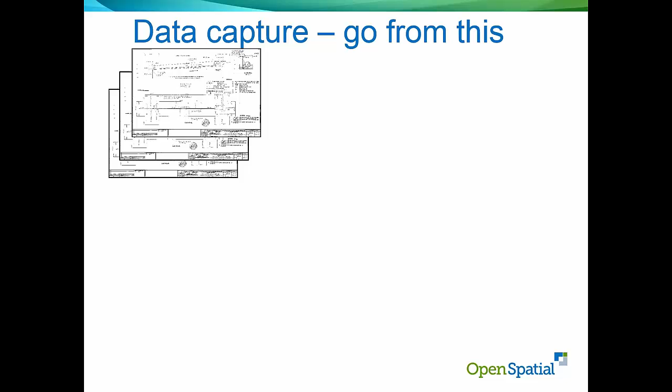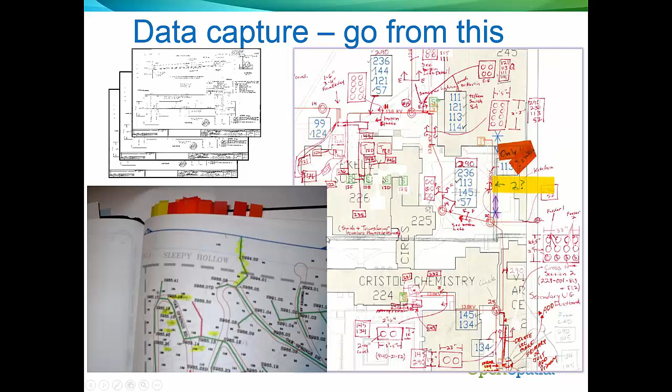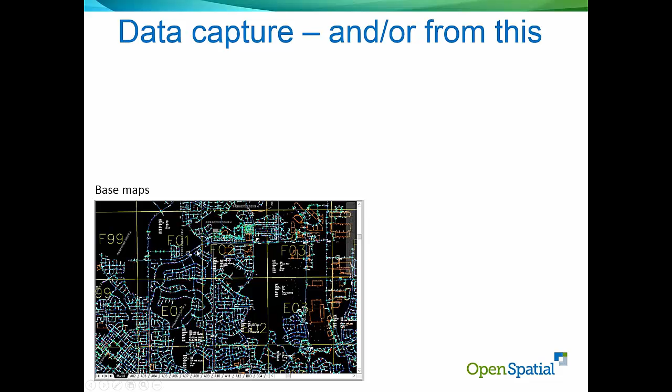But let's take a look at this data conundrum. Data capture can really go from scanned record plans, red lines, or map books - on the paper side, this is kind of where you'd come from. Or you could have CAD drawings, base maps, map sheets, and various kinds of base maps.

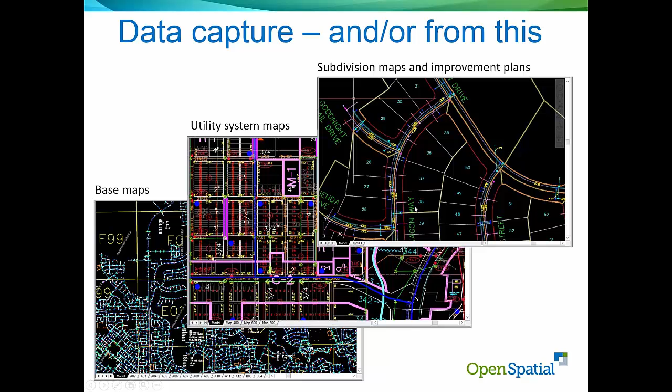Or you could have specific utility system maps or purpose-built maps. Or you could be at the stage where now you have subdivisions and improvement plans coming in, and you have a GIS and you're trying to bridge that gap between the CAD stuff and getting it into your GIS. So data can come from virtually anywhere, and I'm going to touch on those sources and show how you can build that out.

Let's start with this CAD piece. I'll go back to the paper, but just CAD in and of itself - CAD data is interesting, it's just not designed for GIS. It's designed to view and to communicate information. And so when people draw things, they don't always snap stuff.

They may even break lines so they can put text there so it's readable. Of course, that really makes a problem if you're trying to get a line into your system that's an actual pipe going from one point to another with a length calculated. Or if you're doing a modeling network and you have pipes with no node or junction on the end, and they're just incomplete - so you don't know whether that connects or doesn't connect, or whether it's just bad data.

Or even putting symbols where you break the line work to leave space for where the symbol is and you snap to the edge of it. Now, CAD is a great tool, but you can draw anything you like in any which way you like.

The amount of level of structure is one thing, and the other part is the attributes. It's really fairly difficult to get attributes. You can go into blocks, and this may be text, or it could also be an attribute within that block. But even if it's an attribute in the block, that still doesn't solve the conceptual problem of northeast, south, and southwest, where you kind of have to go do angle calculations and assume the map is true north. But just reading things like 24-inch chilled water return versus supply, or invert elevations and rim elevations, and getting all of that loaded, or ID numbers for various valves and appurtenances.

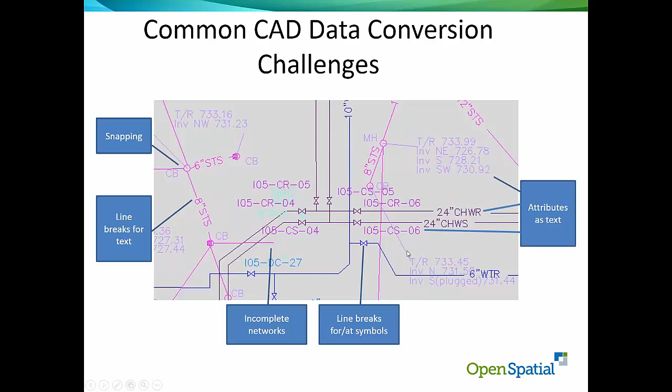The other thing you may have is this: a whole set of folders, and in the folders you have scans of the actual signed plan. So this is the legal data of record. So going from paper to CAD, how do we get that into GIS?

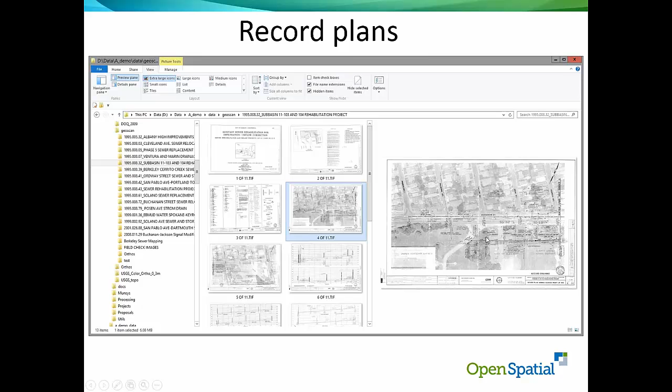One of the things we do is we have this product called Munsys, and in there one of the functions, it's a set of menus - I'm not really trying to focus on the product too much, except to show you that it really helps a lot with this. But you can take an image and what we call geo-reference it.

One, it's very useful because now you can do heads-up digitizing, and you can go edit and update or create new data. If you're doing that in Munsys, you'd do it right off the menus, so that would be very quick and powerful.

The other thing is there's a lot of information on this plan that you might want to use later on for other things, like where was the electric line that came through that they did this, when they surveyed this they went and found it, or the storm drain, or anything that goes on with this.

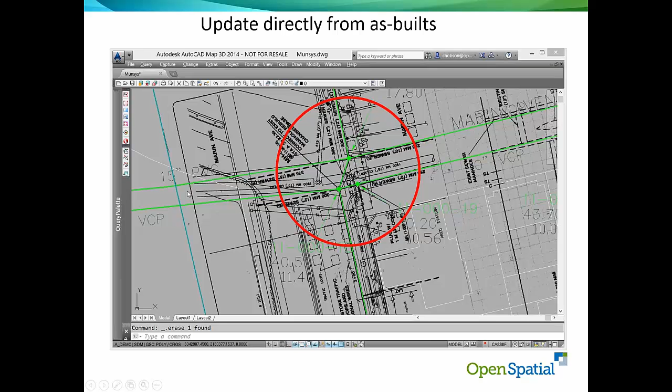The other thing is the plan itself. What you really want to be able to do is come back later and say, what plans do we have at this street intersection? And so when we capture this, we actually capture metadata with this plan itself.

So this little box - we actually put on that what the file name is, where the folder is. You can enter attributes of what the project name was, what the year was, and everything. And then you can go anywhere on this map and draw your little box and query everything into that particular box.

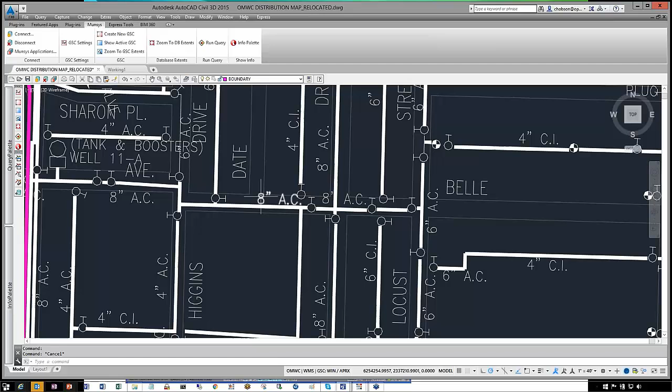Let's go look at this data set quickly. Here's some CAD data. This particular one has already been relocated, as you'll see in the title. If you look at the CAD data, it has exactly those sorts of problems. This one's pretty schematic, so you'll see it's just a line, not broken where something tees off it. The attributes of the line, I can see it's in the layer, but that's about it. The scale, things are large, exaggerated. The text, the pipe material, is not on any of these pipes, and it's very rough.

If we locate this against the actual parcel map, you'll see that they're pretty far off in this area.

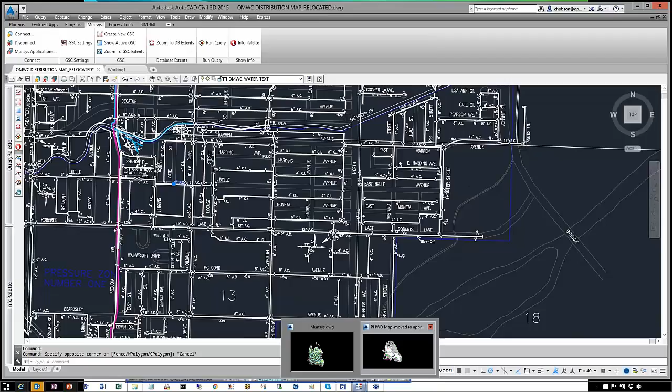If I go to another data set, here's a system-wide CAD drawing. If you zoom right in, you'll see that it's got all of the stuff in there. This red pipe here is a water main zone 2. I can see that in the layer. Wherever you have a hydrant, it's not broken, the line just keeps going straight.

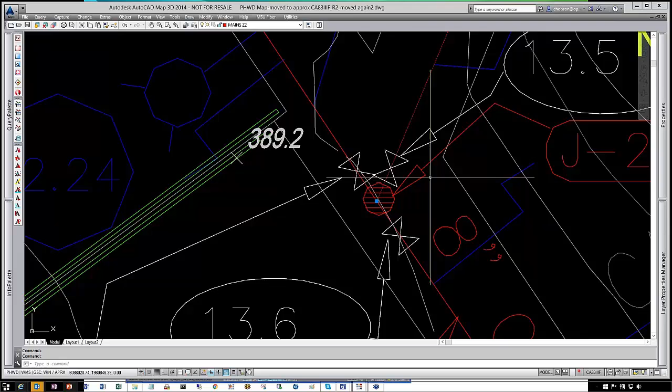So common problems you see there: how do you actually get that to go straight through the valve? How do you get things like the valve number here? This thing is actually four separate lines, so obviously someone exploded it, so it looks like a picture, but it's actually on the line there. And its number, this would be the valve number right there, is a piece of text, and it has some line work that goes with it, and a dimension arrow.

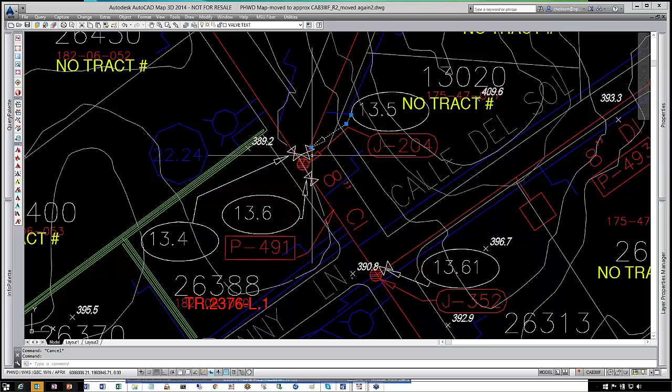So getting that into your GIS is the challenge, one of the challenges. In this organization, you can just see that they would not be able to give you length of lines by diameter or material. They would not be able to say, okay, show me the nearest hydrant to this position along the pipe. You wouldn't be able to relate pressure on something, calculating through a network or anything like that. So it's a big challenge, even their numbers, so that would be a customer number, and getting that to relate back to which pipes service what customers, or if the pipe breaks here, who's impacted, kind of difficult.

And that's not because CAD is bad, it just wasn't built out. This drawing was drawn years and years ago, and some of these are directly off paper.

So let's go in and just open another one here, and I'll show you that geoscan quickly. All right, we'll go up a little. Yeah, let's open this drawing. So I'm opening this drawing. As I said, what Munsys does is connect you to a single central database, and so you need to log in. I'm just logging in on a demo data set.

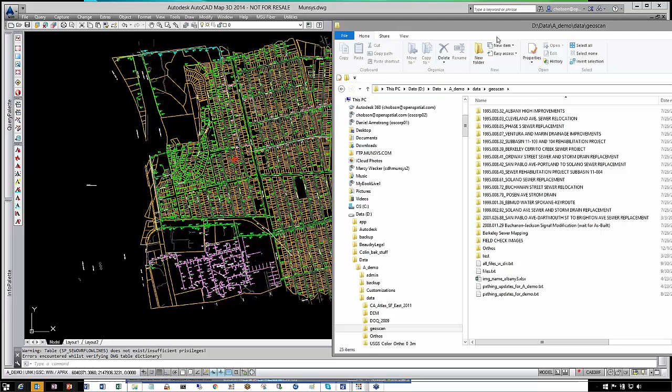So if you go here and you want to geolocate a plan, for example, what you can do is this sort of thing. I'll bring over my Explorer here so you can see what I'm doing. If you have some data, for example these folders, just pull it so you can see it nicely. But choose one of these, say you had a plan, one of these TIFF files that was a plan view. So this would be a project, and you'd have whatever you've got here.

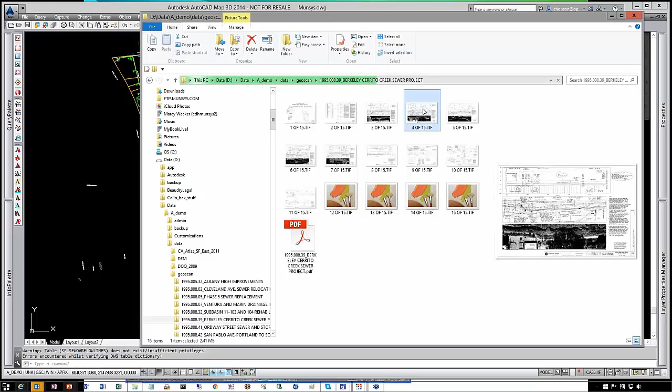Let's take a single page here, look at maybe page 4. When you use this plan piece in the middle here, it has actual locations and everything on it. So typically you just take that and put it, insert it somewhere close to where you want to put it, just to get it somewhere on the picture. Don't even worry about the rotation. So there we have a plan, and you can see there's a bunch of information in here, and it runs, there's the section and plan.

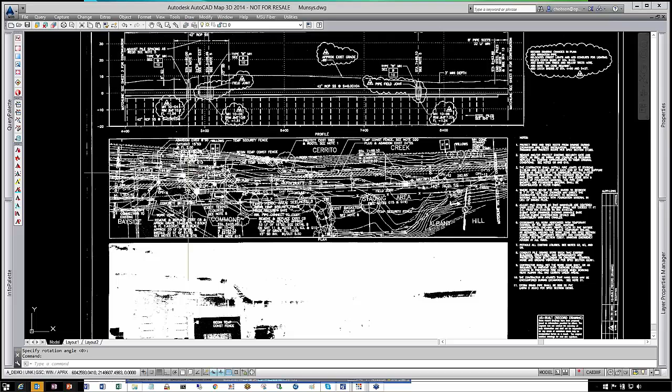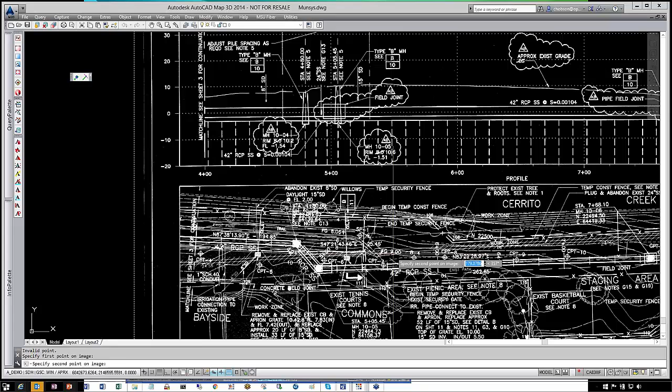So using the geoscan tools, you just go to that menu and literally say, let's say this piece here actually goes along this piece of the street. So what I would do is insert the image I did, let's go in and actually georeference this, and we choose that image, and you'll notice I just get prompted, show 2 points, and I'm going to save time by just showing very quickly. Then pretty much just go in and snap, use all your CAD snaps to 2 points on the map. Let's say that one, and I suppose I said I'd use snaps, so let me turn those on.

There we go. And so now it's scaled and referenced this thing. So that just makes that easy. The real value is the next part where we create a boundary automatically and read the data from the image. So I can say, show me this image.

And now it's created this green box, which it's automatically pulled out of that plan, what the file name is, the path, when it was scanned, and you can now come in and add additional information like the project number, project name, typically the date, anything like that. So this is just editing tools provided in the Munsys product. So you can go in and change edit attributes.

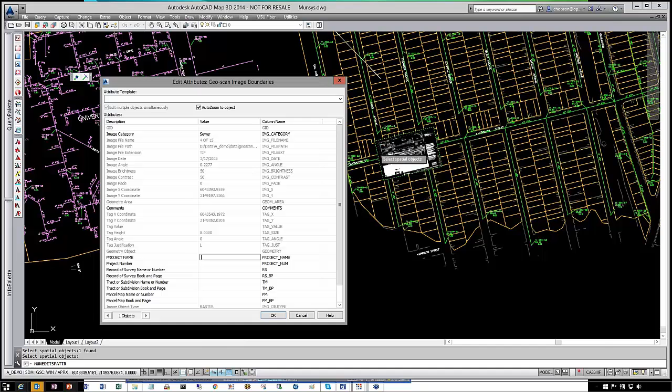And let's go to this particular plan. And let's say typically we put a category. Like this, I think, was a sewer plan. And you can go in and put in whatever the project name is, and post that to the database. Once you posted it to the database, and I won't actually do that now, I'm going to just get rid of it because I just didn't put it in the right place, so we'll move it out of there.

Once you've posted it to the database, the next time you want to retrieve anything, you can say, go to an area of the city. Like take here, for example, they were doing ADA ramps here. You can go in and set your area of interest right here for these street corners. And at this point, run a query to say, give me all plans I have that intersect with that. So you're starting to do some GIS stuff.

And let's go and say, run this one. And what it's done now, if you look down the bottom, I think I'm going to undo that. I think I had a setting that did not use my little boundary, so let's just show that boundary. Yep, we need to use our area of interest, so we'll run that query again. So you can see the 137 that were loaded. Now that looks a little better. You can see down the bottom I have 8 boundaries loaded.

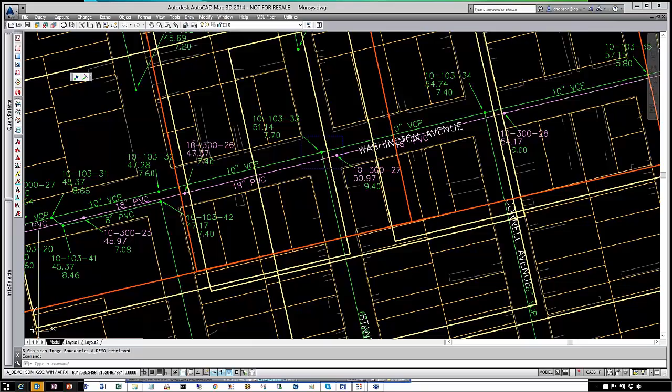And if I zoom out a little, you can see the squares are colored either yellow or orange. And each one of those is a different kind of plan. The orange ones are sewer plans, the yellow ones are field checks. So at any time I can come in later on now and get a punch list of plans that intersect that area. And then I can come in, of course, on the screen and load those.

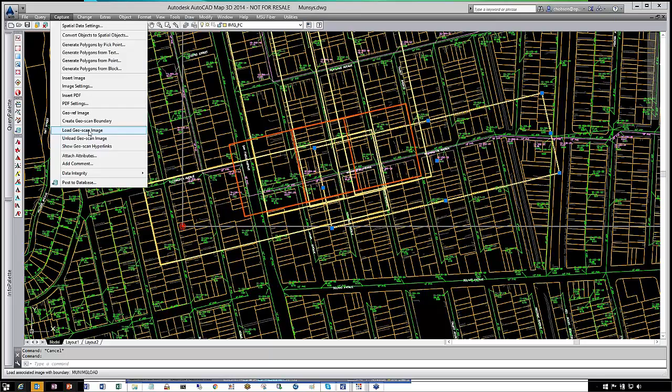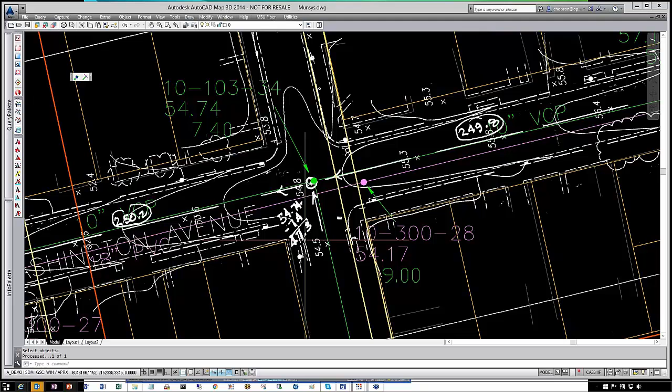So I just go in and load the image. It says which one. Let's say this one here. And hit enter, and it'll go. It knows the path. It can load it, and now we can restore it as backdrop again. And so you'll see these values here were actually loaded, they're by the depths, and we've got 7.4, 54.74, and there's all calculated field check. So this was a project to load this. So that's paper.

You can draw straight off the menu. And if you do that, you're essentially recreating CAD data, and you could be doing that just in your GIS product as well. Except CAD really does offer a very rich drawing experience and very efficient. But if the plans came in as CAD data, the thing you could do in Munsys here is you can literally just go in and convert a whole bunch of line work or blocks to any kind of object, and this is in the water application, and we have specific industry-specific applications for the various utilities.

So if I was taking this set of lines and I said, okay, I'm going to use the actual CAD geometry for these lines, I could go in and do a quick select and select them all by layer or whatever, but for now, I'll just pick a few. And I could go in and convert that. So I've taken that as CAD now and turned it into a database object. All that we've done is taken the default.

So at that point, you could also go in and edit attributes. So we take this CAD data here that we just put in, and we can say, okay, let's edit the attributes on that. And let's say that actually was a 6-inch PVC pipe.

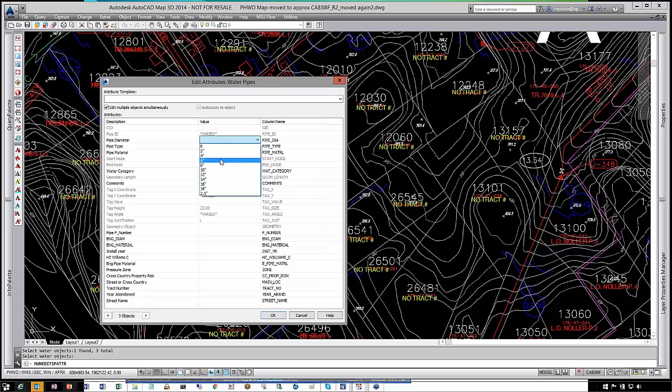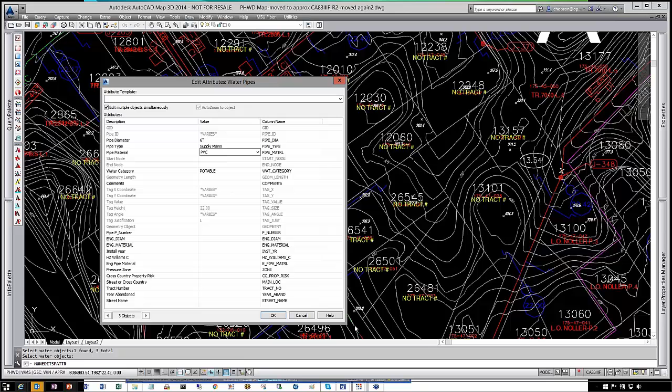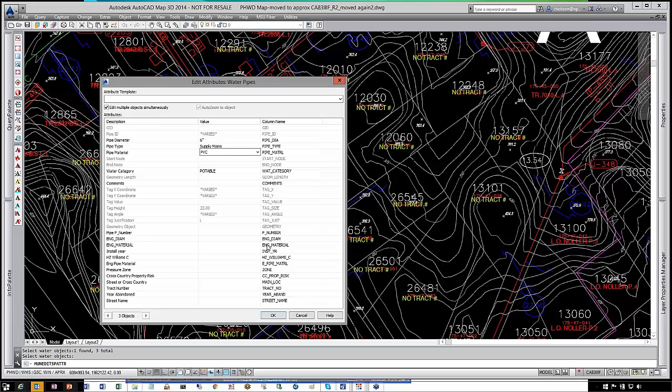Okay, it's a supply mains, and so we start adding. You could be doing this in your GIS, except that I've now converted that directly from CAD into here. Munsys deals with arcs, it deals with attributes and blocks, so that you can build these out, and then it also allows you to build structured networks. So very, very powerful set of tools, and really speeds up the ability to do that.

Now there's a couple of things you have to bear in mind. One of the reasons this is very powerful is you want to keep data in the control of the people who use the data. So for engineers, you want to keep them using CAD. And so Munsys allows them to edit their own data. Every bit of data that I convert here into the database can be viewed and connected to through ESRI, for example.

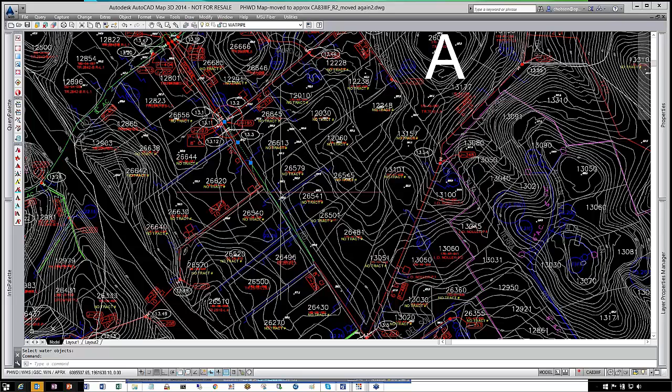So what we're doing is you're changing who's responsible for editing the data, and that's really probably the biggest impact, because you don't then have to go to an engineer and say, oh, by the way, you're going to use CAD and GIS, and you're kind of going to work between the two of them. Mostly, if you're using the Munsys product, you can continue to use CAD and build out your data, but in the meantime, you really are building GIS data with structured, connected networks that are traceable, drainable, all of that, and I'll show you that just in a minute.

So inside of Munsys, there also is the MunConvert, because part of the problem is that a lot of the objects have more data, like in a block or something. So line work, you kind of pick out layers or whatever. But let's say I wanted to go and do water nodes. We could come in and look at the drawing. And so this is a tool for pulling in, if I go to assign, if there was object data, you could see these are all of the object data tables in this drawing.

I could pick up for this particular node type feature category, and I could put that into that column in the database. I could also go in and look at if there was elevation, I could pick that up off of the object property. You see this is exposing all of the details within the CAD drawing. Okay, so if I looked at object dot, let's see, we got a block position Z, so that would probably be for the nodes. We would put that in as the elevation. So as I go in here, I can put things in.

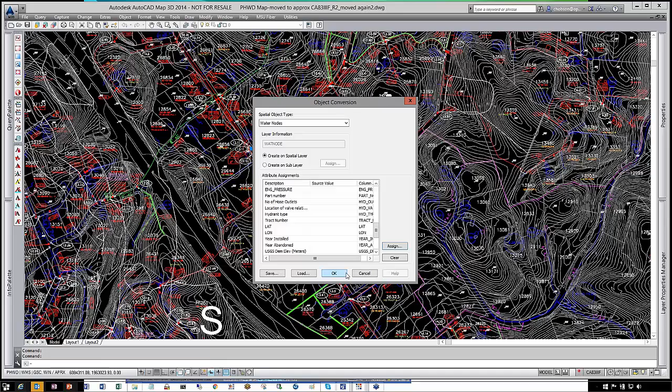You can assign IDs. So if you don't have an actual number, you could assign that from a database sequence. So we come in here, we put it in off of, say, we're doing water nodes, so that would get the next available number. Any number of those things. So you can put in, and this is literally mapping. Here's the table in the database. Where am I getting that from the drawing? You save those profiles, and you hit OK, and you select your objects, and you put them into the database. And that's really how you can go from this, which is the CAD drawing, to this, and I'll show you the processed version of this data.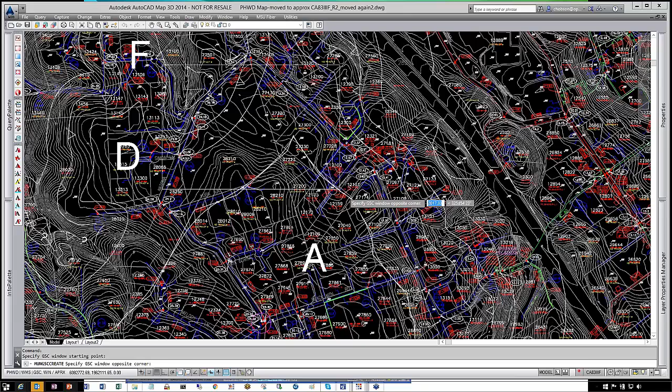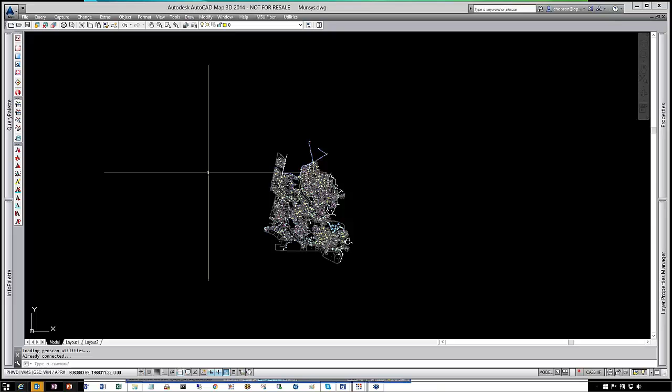So let's go to the CAD drawing. Actually, I'll stay there, pick an area, I'll set a window. You see this window? Let's look at that. I'll zoom to it, so we'll be in the same zoom state. So there's a blue box which you could probably hardly see there, and I'm going to go and look at that in this here, which is then a query back out of the database of the same GIS data. So let's zoom to that same position. So here's that same network, except now the line work is consistent. So if I select a pipe, it goes from node to node.

Let's zoom in and show you that. So there's a hydrant over there, there's a valve over there, here's a pipe. And it goes from the hydrant to this valve. It has these 3 service connections on it. So if I click on that pipe, it's an 8-inch transmission mains, and actually let's put this to formatted values. Right, here we go. So it's 8-inch transmission mains, it's cast iron, its start and end node, which is the internal number of that valve and that hydrant. Start and end nodes are these 2. It's potable water.

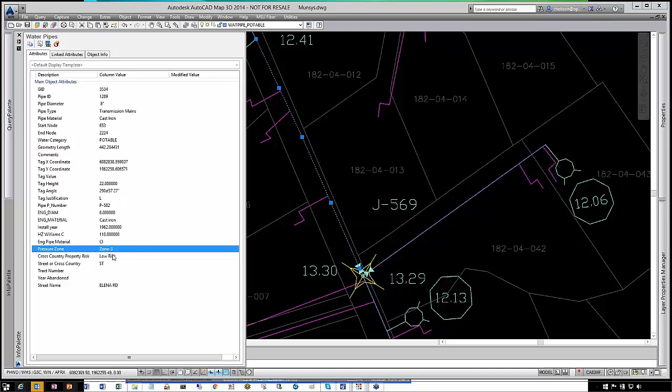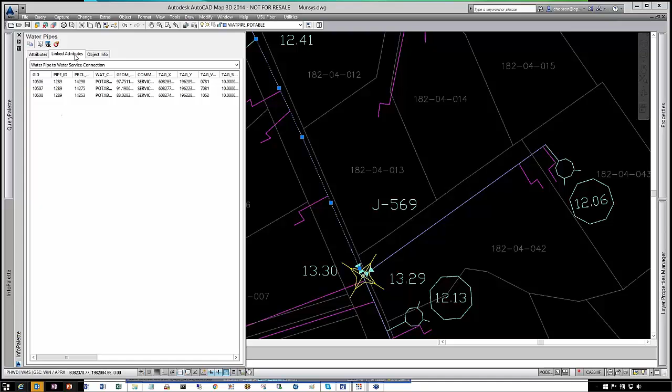We know that it's on zone 3, it's got low risk cross-country property. It was installed in 1962, and we started building out the modeling on it. In addition to that, using the data models in Munsys, there's 3 service connections on that pipe. You'll see they don't break the pipe. So there's a whole lot of specific things in these applications that are on the menus that you build out.

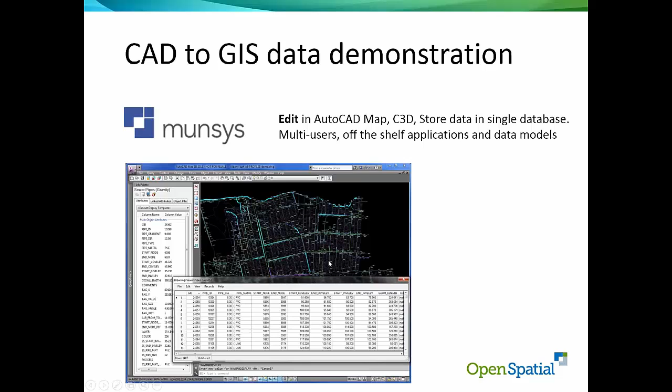So now we've gone from a CAD drawing to a structured drawing that has a whole lot of data in it. All right, let me go back to the PowerPoint quickly. So that's what this picture shows. You can go from CAD to GIS. Let's look at this example.

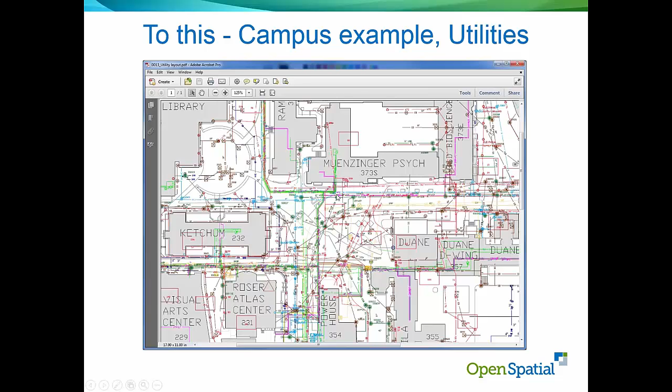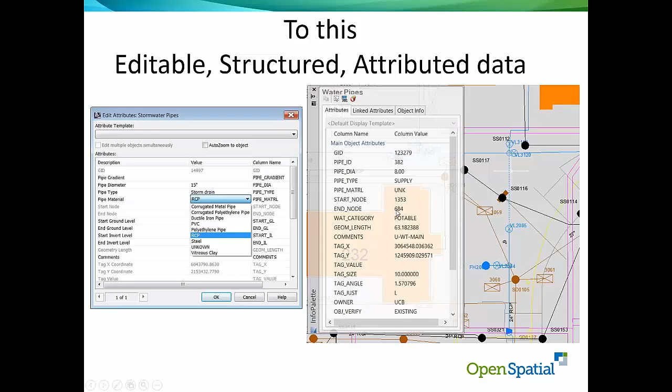Here's a campus. There were like 16 different utilities, gas, underground tunnels, steam, everything else. And you can select on something, and I showed you that you get these attributes and pick lists for editing and updating to keep your data integrity there. So that's the first part, which is really just using the Munsys CAD GIS thing.

I'm going to move on to the second part of the presentation, which is ACDC, but before we do that, I've just opened the poll to ask you, where does most of the new data in your organization come from? Okay, I'm going to give you just a few seconds to answer that, and then I'm going to talk about the second part of this. All right, so far we've got fairly good response. I'll let it go for another 5-10 seconds. Looks like most folks just about voted.

All right, so where does the new data come from? I'll read it out. I've closed the poll. We've got 70% of new data comes from CAD. And the percentages aren't going to add up, by the way. 30% GIS, 30% GPS, 20% paper, and 20% LiDAR. So by far and away, the majority is still coming from CAD. So thanks for doing the poll.

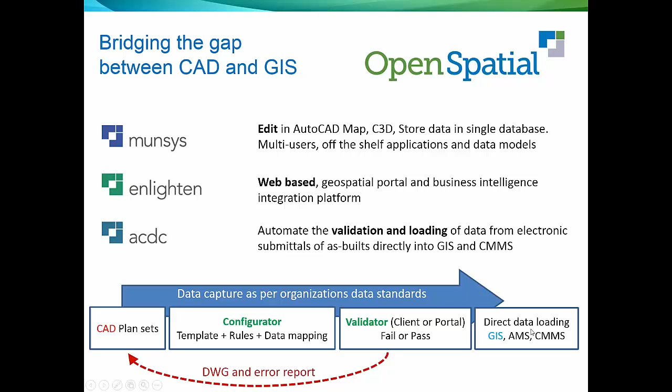If all of that passes, you can push another button and directly load the data using the mapping into whatever system you want, and we'll simultaneously do CMMSs and GISs or SAP or whatever it is, Maximo or anything like that. So to do the configuration, we check the location. We literally go through where every object in the drawing needs to be put into your destination database. So you take a fair amount of time defining it, but after that you then can push the button and load stuff, which is a whole lot better than rethinking it through every single time you get a submittal or drawing it up or having various people do data capture.

We also define exactly where to find the attribute information. Is it in the layer name? Is it on an attribute? What's the name of the attribute? What are the values? Is it a date field? Is it a numeric? We check for all of those things. The required data format and also the geometric requirements. So we can do snapping. We can check whether something is on the end point, the midpoint, or if it's dangling inside of a polygon or whatever. So we build that all out.

So the validator, it has its own little icon. You actually set up and run the rules inside of ACDC's validator, and that's in AutoCAD. You define the rules in there. The rules themselves are stored in a rules database.

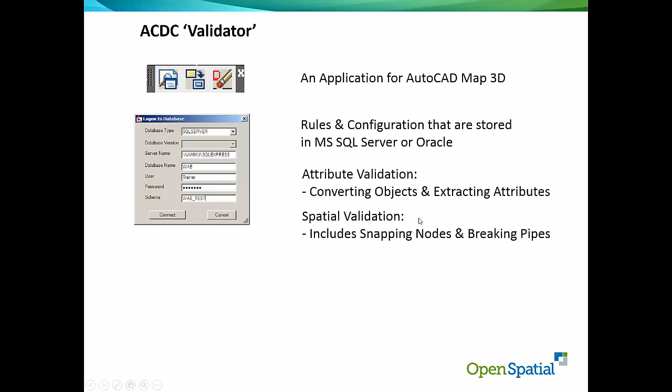That can be in SQL Server, Oracle, anything like that. And what we did is we allow, through the validator, we actually validate and then extract the attributes. And so the validation allows you then to also load that data directly into your system. So we do geometry, attributes, and snapping, any of those. We write errors out. So let's show you a few pictures.

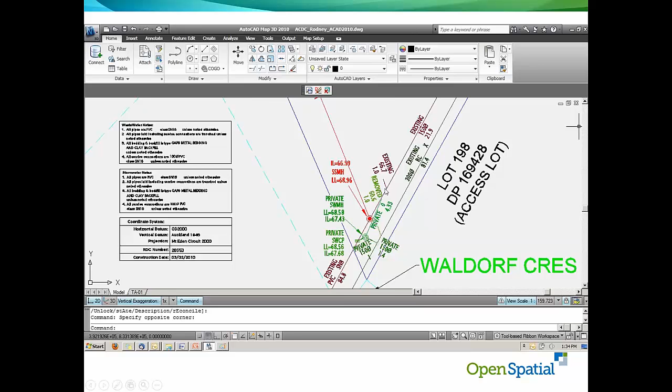Here's a drawing drawn with the template. So the template would have like a block for a stormwater manhole, and it would have these attributes in it, and you'd fill it out. This one looks like metric, probably comes from Australia. So if you look at the properties, when we create the template, we would actually create a block with these things for you, and you'd need to go and fill them out. So you drag and drop the block, place it, and then set which ones display, what needs to be displayed, and then people could put in data.

And some of these are mandatory and some are not. So that's drawing it. Simple. People are doing that right now at the moment anyway. All we're saying is, hey, here's a template and here's our standards. So all that's stored in there.

We also deal with line and polygon data, and for line data we put a block on the midpoint of the line or in the center point of the polygon and associate the attributes with that. And then when you do validation, we pick up those attributes and assign them on the line or the polygon, and then you'll see them just like I was showing you a while ago.

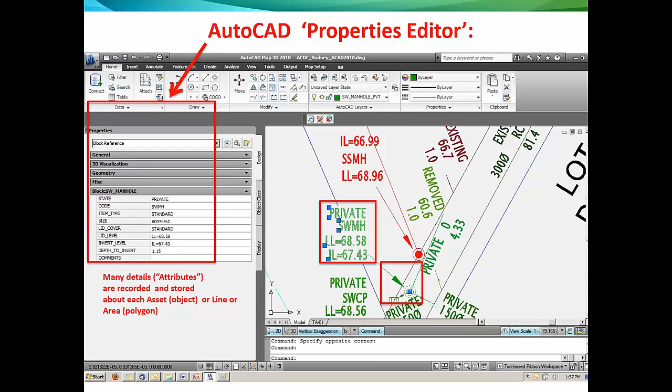Here, for example, is diameter and length, and you can see that the letter I there has been put in, and so that will come up. A numeric column cannot have that, so it's going to pop up as an error. So here's how you'd see it as an error.

A circle would be drawn in the drawing on an error layer, and the circle block would have the name of the column and what was wrong. And they literally can zoom to each one of these and go fix it. So when you get a drawing back with errors in it, that's what you get. You also get a listing of those errors, so you can literally punch list and go through them.

So what we've done is change the old process of taking various CAD standards and templates, stuff that's drawn by the engineers. They then get delivered by the consultant engineers to your organization. You then have a plan check approval process, and at some point when it's gone through that, you get as-constructed submittals. Hopefully you have it in place where they actually submit. Now that the plans have been approved and we've done the construction, we do a second round and we get these submittals. Usually this is paper.

You can ask for that in CAD, especially as you've given them the template. So there's sort of the carrot and the whip here, because you can say, look, we'll give you the template, we'll give you automated tools for how to check, and that means we'll do the approval faster, or we won't charge you to capture the data when we get it, because if we get paper data, we as an organization are paying for the capture of that. So you can use that as one of those little carrots to say, if you use these standards, we're not going to add a premium for having to capture the data. Not all organizations do that, but in essence it is costing them.

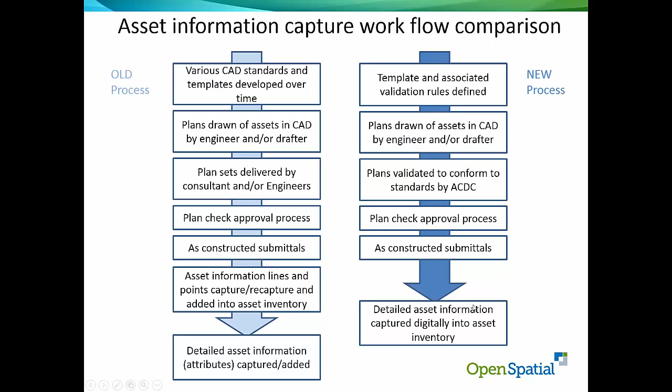Then once they get back to their submittals, you can insist that a CAD drawing—if you really wanted it to go all the way, and I know it takes time and people, you've got to kind of work on it—but 5-10 years from now, we should be able to take a plan, push a button, get the data, check it, and that's what this thing does. So for the as-constructed submittal, if you get an updated drawing file, you could just as well validate that and automatically load it into the system.

So what we've done is put that whole validation piece on the web. There's the ACDC portal. If you go to www.asconstructed.com, we'll give you an account for your organization or that particular project, and then you manage that and set the standards, and then consultants or internal folks can upload and check without you doing anything.

The other thing is the validator and configurator run on the desktop. So the validator, you can just as well use those same rules, go into AutoCAD and run it and check against your corporate standards. And when you want to load the data into your system, you'll need the desktop connected to your corporate systems, and then we will literally insert data into tables.

Normally in the GIS world, data is put into temporary tables, and then somebody matches or ties that together with the existing GIS data, but it's already data that's in there and already been checked for attributes, so it's a whole lot different than having to capture it from scratch.

So the portal itself allows people to pre-check. It gives you a very quick turnaround and an independent sign-off. The benefit to the organization is you're only checking data on drawings, not whether they've got layers and line styles and stuff like that. You're actually doing the intelligent part of checking as opposed to the menial part of checking. Okay, so that's kind of the portal.

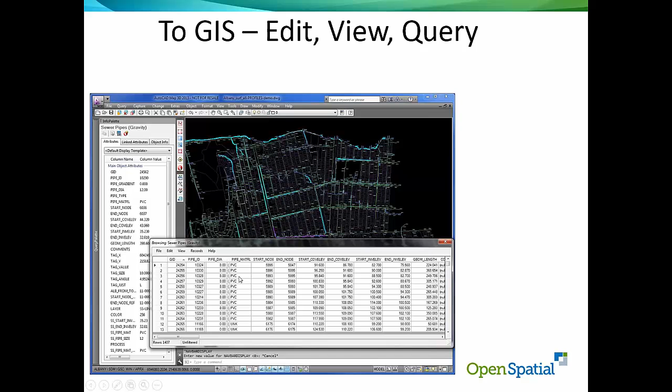So to finish up, just to show, I started out with CAD and paper. Let's just finish up with GIS stuff. Here's then a complete attributed network. You can see a listing of diameters, materials, start nodes, end nodes. If you take that data set, you can push that into the web.

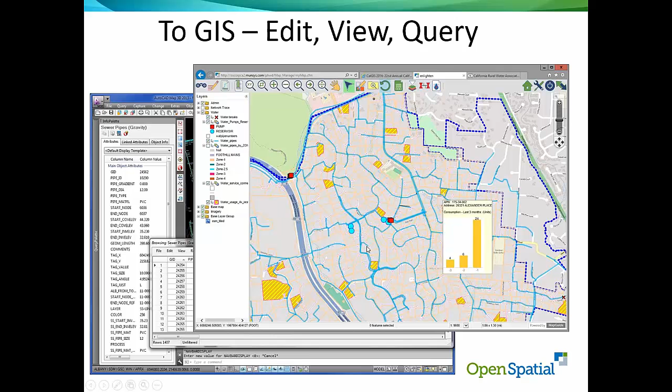Here's that same data I was editing on, and actually it's now been integrated with GIS. So you can edit, view, and query, like here's the water consumption for that particular customer and their last 3 months. And this one where consumption is 4 times the average of the last 3 months, we've highlighted those in yellow. So we've gone all the way from where the pipes are right to billing and tied that in.

Here's something like this, if this pipe breaks, which valves do you need to shut off? 3 valves, and which customers get impacted. So that's using that network and building it up.

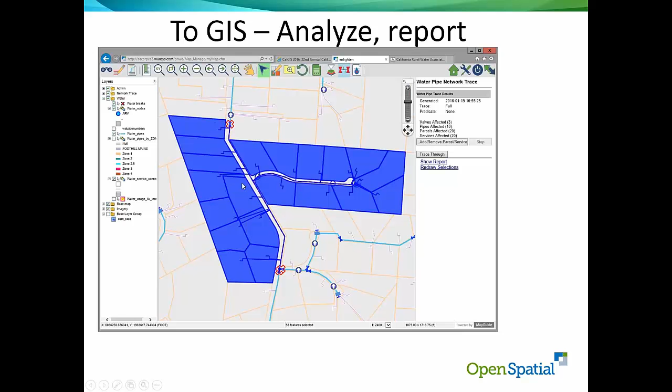The same data I was editing on just a minute ago. Here's a report, for example, of pipe type by decade and the number of miles. And yes, there's still 9% unknown material and 15% unknown age, but building that out using the GIS.

This particular customer 2 years ago, there's just no way they've been able to do this. And we can look at things like some pipes like asbestos cement. Well, turn of the century, they really didn't have them. So that's probably a data error, okay?

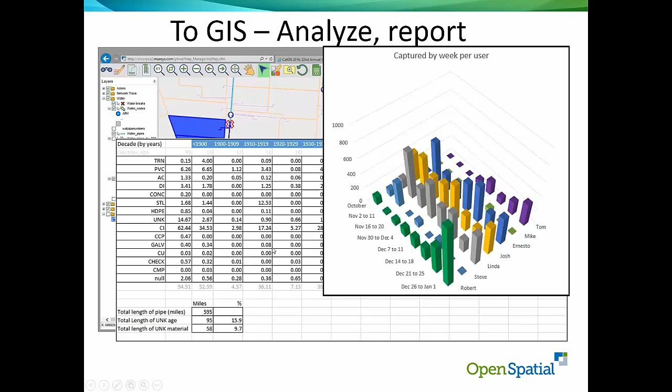It was put in a certain time period. Things like, you know, what data has been captured over what time period, things like that. You can really build it out.

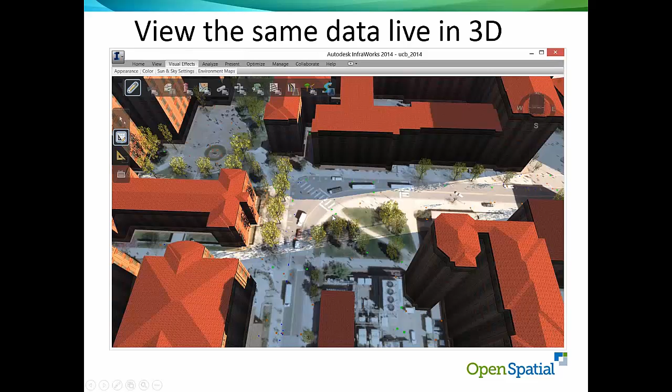Here's the same data. You see these little spots? Those little dots are the utilities underground. If I back off that image, you can actually see through it. So looking at that manhole and that tree, we can get attributes. So this is a live view of the data that was all CAD.

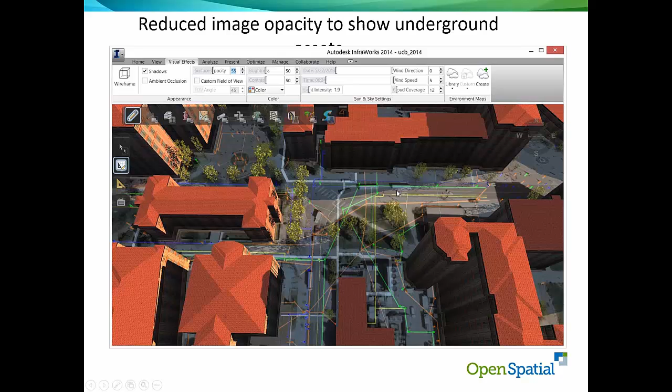Gone into GIS. If I back off the image, here's that same data underground. You're looking through the image, same buildings. If I zoom underneath, I didn't do the 3D thing, I'm just taking screenshots of it, but it's live, you can move around on it. That's really where we're at, so trying to tie it together.